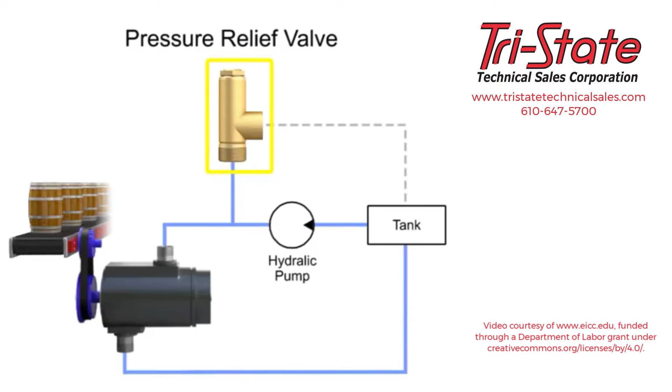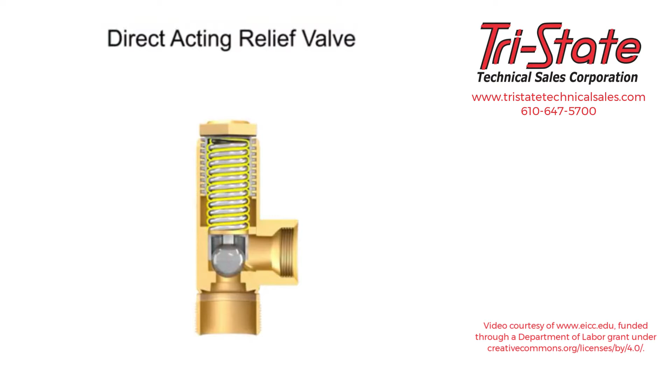Pressure relief valves fall into two categories: direct acting or pilot operated. A direct acting relief valve is held closed by the direct force of a mechanical spring. The spring force holding the valve closed is opposed by the system hydraulic pressure.

The cracking pressure is the minimum pressure at which the valve will begin to open. This pressure is set by changing the tension in the spring using an adjusting nut or knob.

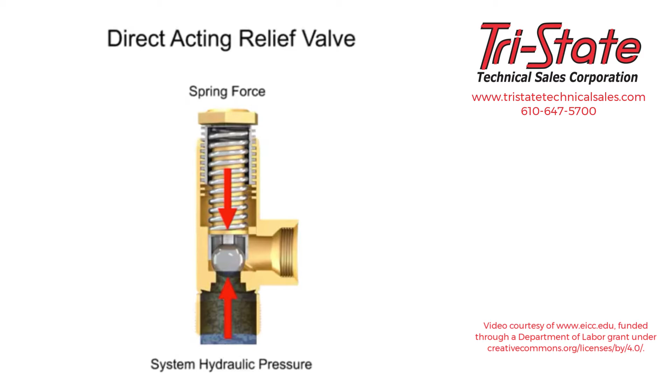As long as the system operates at a pressure at or under the cracking pressure, the valve remains closed. If the hydraulic pressure increases even a small amount beyond this level, the valve begins to open and fluid begins to trickle through. The pressure at which the valve is fully open is called the full relief valve pressure, and is higher than the cracking pressure.

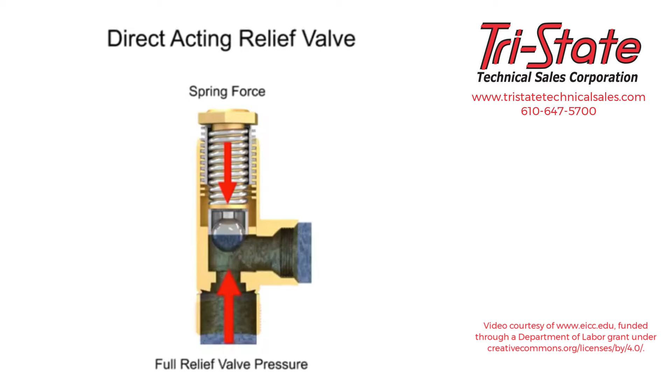When the hydraulic fluid in the system reaches the full relief valve pressure, the valve will be fully open and all fluid is discharged through the outlet port.

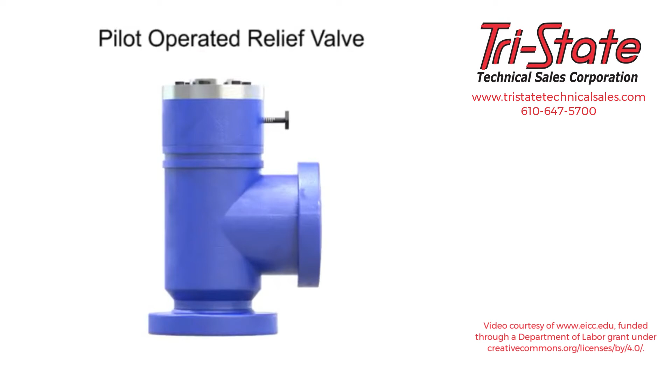A pilot-operated relief valve makes it possible to handle higher pressures and flow. It's also much smaller than direct-acting valves rated for the same pressure. This valve has two stages.

The first stage is composed of the main valve with a poppet and spring large enough to handle the maximum flow rating of the valve. The second stage is composed of a much smaller direct-acting pilot valve, which includes a pilot relief poppet, pilot spring, and an adjustment knob. This smaller relief valve is usually mounted crosswise on the main valve body.

As long as pump line pressure is less than the relieving pressure set on the control knob, the pilot poppet will remain closed. Since the pilot poppet is closed, the pressure in the main spring chamber is the same as the line pressure. Since these pressures are equal, there is no pressure drop from one side to the other, and the main poppet also remains closed.

When line pressure increases higher than the relieving pressure, the pilot relief valve moves to its open position. This allows fluid to flow from the pressure side through the orifice and across the pilot relief valve to the tank.

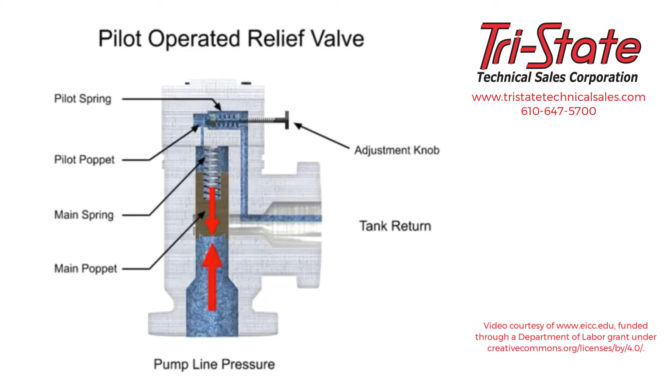Once the pilot valve is open, there is now a pressure drop across the main valve poppet with a higher pressure on the pump line side. This causes the main poppet to move, allowing full flow through the relief valve.

The same is true in reverse. As the pump line pressure decreases below the relief pressure set by the adjustment knob, the pilot valve will close. This allows the main spool to close and restores a balance of pressure.

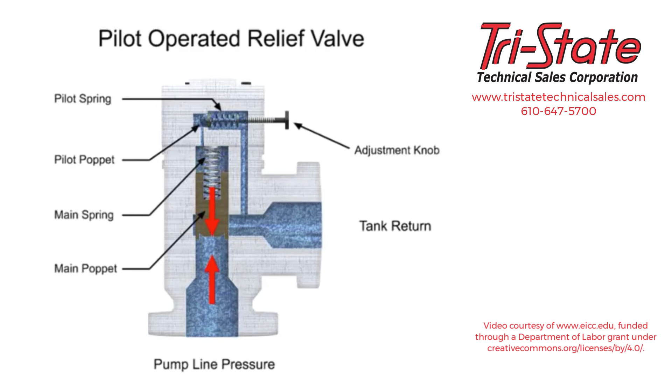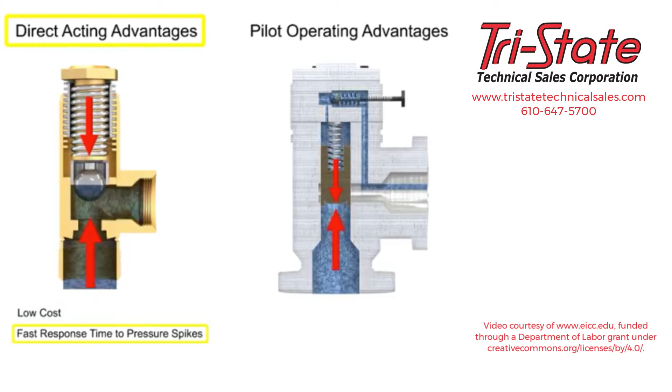Relief valves can be used anywhere in a hydraulic circuit where it's necessary to prevent pressure from exceeding a maximum level. Advantages of direct-acting valves are their low cost and fast response times to pressure spikes. Pilot-operated relief valves are advantageous due to their smaller size and ability to work with higher system pressures and higher flows.